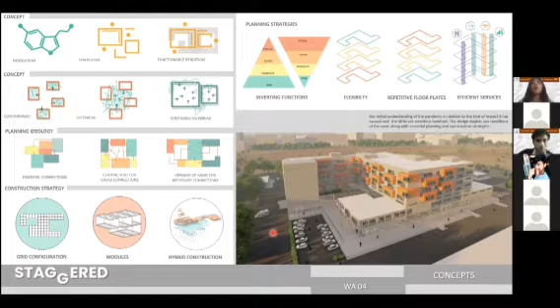Site areas in the need of healthcare centers. That's how we came to the Pimpri Chinchwad area in Pune district. We also did a lot of research in terms of where new quarantine facilities were being established so that centers can provide healthcare support to them. Here, there is also optimal use of a site which is lying absolutely obsolete during the time of the pandemic, which otherwise plays host to farmer trade fairs.

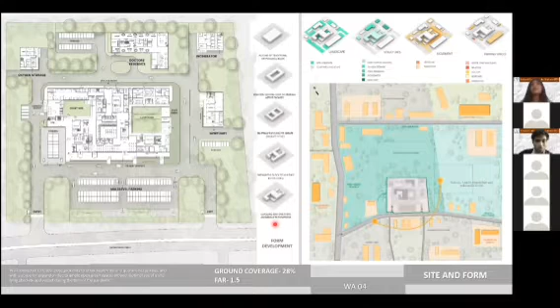While developing the form, central voids were created in the hospital blocks to provide for courtyards and to also... the central arm has several main functions and hence is wider, while the other arms house ancillary areas and are sized accordingly. The block is kept as one consolidated structure for extremely smooth transition of spaces as required in an infectious disease hospital. Vertical development was preferred in two main arms, while the front arms are kept low to optimize views for the whole structure and to also get maximum light into the courtyards. Next slide.

So talking about the planning, for us, it was always about the users of this program. Every space was first visualized by us as if we were patients. We constantly asked each other if we would like to step into this space, and if we did, how would we feel and function? So spatial planning was given utmost thought and is done with a lot of integrity.

The ground floor planning strategizes the spread of arms to provide various access points for different users. There are four main cores, one for relatives, one for doctors, for patients, and for the service to avoid infectious crossovers. The driveway leads you to the patient entry, which is placed in the center. And when the patients enter, they enter in a triage area for initial assessment. Optimal waiting areas have been designed, giving social distancing main impetus.

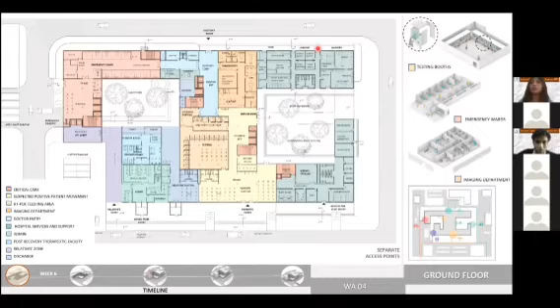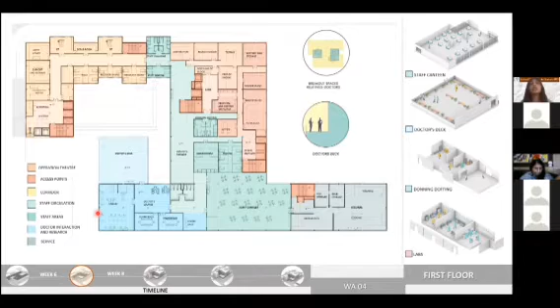Doctors, we feel, are the ultimate warriors over here. So providing relief spaces and decks for them was given necessary thought. The entire blue zone, as you see, is dedicated to doctors. We feel after spending countless hours on duty, it's imperative that there is a place you can go back to and rejuvenate. So the staff canteen is also connected to the kitchen, which has a service lift that connects to the upper floors. Yeah, done. Next floor.

Both ward units are placed such that they overlook into the courtyard and have maximum external connect to optimize the use of light and views for the isolated patients, which is desirable. All circulation spaces have been doubled to space out and reduce infectious crossovers. This also gives the indoors a sense of openness.

Sanitization stations are also placed outside every unit, while nurse stations are provided at strategic focal points for apt surveillance. Also, the doctor's lift opens out into a sealed doctor's lobby where donning and doffing units are provided before they step out into the sterile zones of the wards.

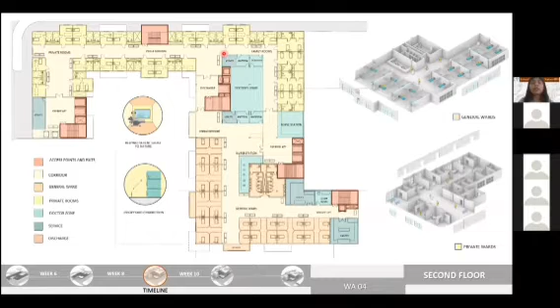We read about a lot of instances wherein patients were seen to flee quarantine facilities due to boredom or longing of family. So we thought it is essential that our design provides for such features in an atmosphere of extreme stress, uncertainty, and even depression. There are also waiting areas and disinfection booths for the relatives before they enter this area.

We also saw a lot of videos of patients dancing in their wards, which surfaced in Karnataka and Delhi during the peak lockdown period. So we thought of giving a multi-purpose and a breakout area for quarantine patients. And we want to also say that, as we emphasized earlier on playing with the words containment and outbreak throughout our design, we would like to put it this way, that these breakout spaces that we designed have helped in return to contain the patient's complete outbreak, mentally and physically.

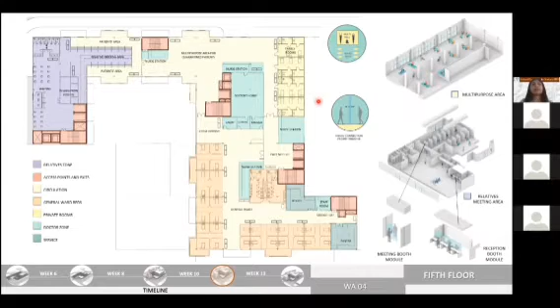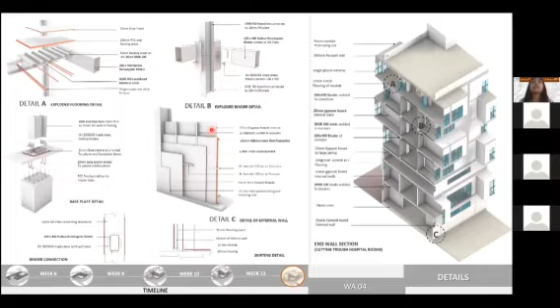PCC flooring is done over metal decking, supported over ISMB 200 joists. ISHB 450 are used as stanchions. Use of box section for binders helps in avoiding cutting at beam-to-beam joinery, which again helps in saving time, ultimately. Cement board is screwed on the steel channel sections and is used for external cladding, while gypsum board is used for internal walls and the false ceiling.

That's about this slide. Next slide. So the modules make judicious use of steel, which is evident in the exploded views. The two attributes that we focused on were modularity and flexibility. So talking about the modules, the cement board flooring is supported by box section binders and ISMB joists. The gypsum board cladding is held by aluminium channel mullions, while box sections are used for transoms. Sheathing board and mineral wool filler is used for insulation.

Provision of double and single rooms on the same footprint of 8x8 column grid was essential and has helped us achieve a staggered form in our facade. The tubular sections used for the structural canopy, which is seamlessly on the front of the structure, is left untreated with transparent covering to highlight the use of steel at the entrance of the structure itself. Next.

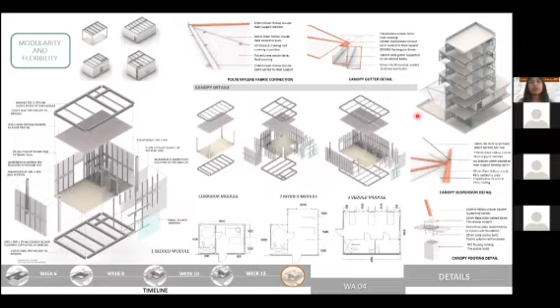Ultimately, we feel that our aim of the design was to keep everyone apart, yet together in a way. So yeah, that is about the presentation. Let's move to the video, Vipra.

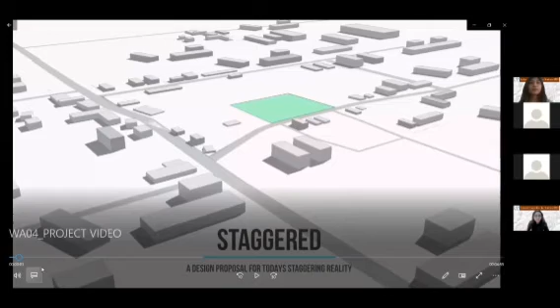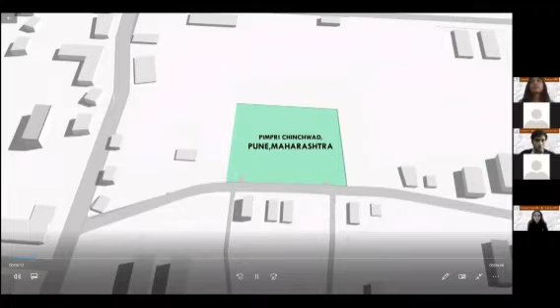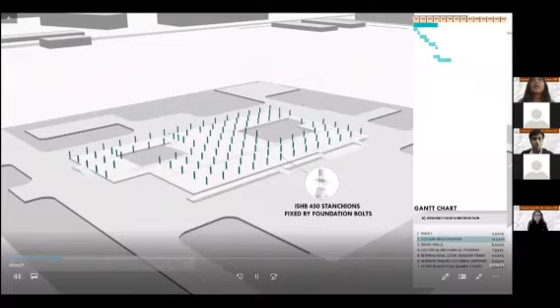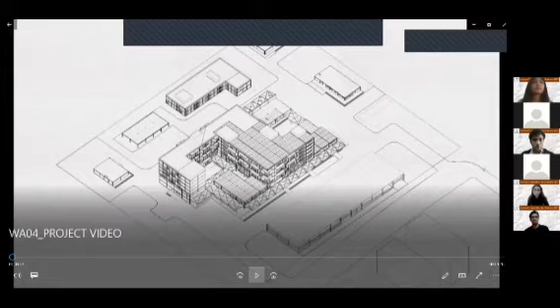Is the screen visible? Yes, it is visible. Vipra, I think the audio is not clear. Not heard, I think. Vipra, you can go back and show the recent one. Somebody can do the commentary. The commentary is recorded, sir. But actually that recording is not coming properly. Siddharth, can you present? Yes, sir. One second, let me present. Let me know if it's heard now. Yes, it is.

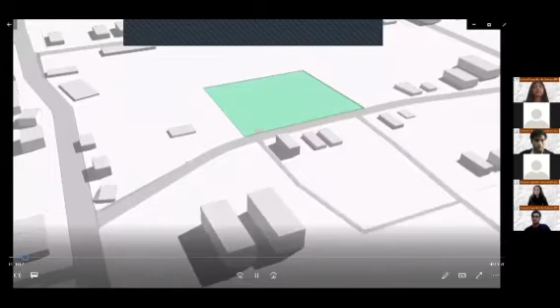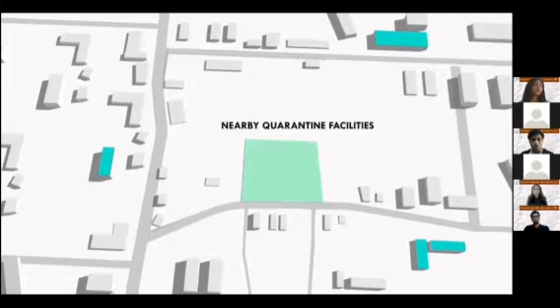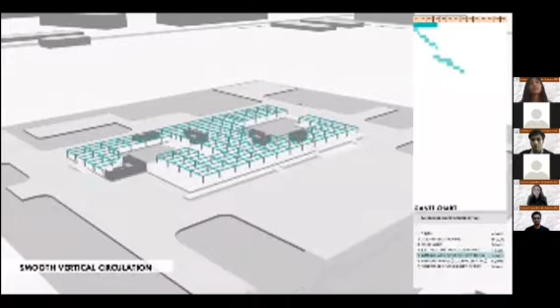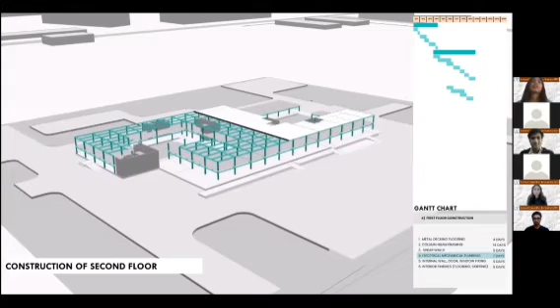Why this site? Connectivity to the Pune-Nashik highway, scope of expansion, nearby quarantine facilities to cater to, currently an exhibition ground, hence well maintained. Ground floor construction begins. Separate cores for different users. First floor construction begins. Hybrid construction, a combination of in situ for the ground and first floors and prefabricated modules for the upper floors, is adopted. The prefabricated modules are then assembled on site.

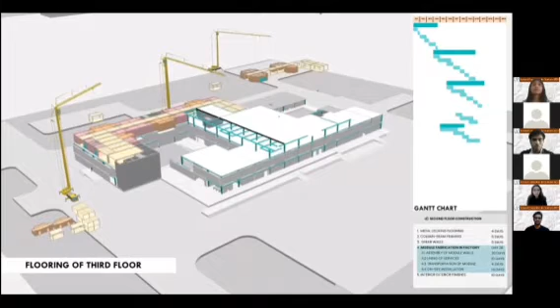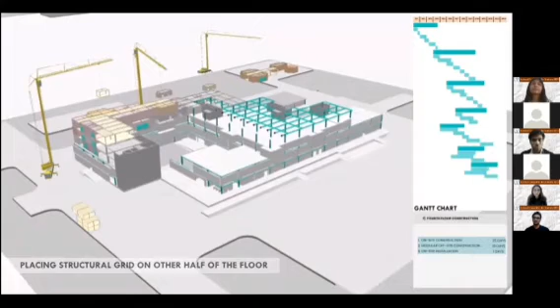Four types of modules: one bedded, two bedded, three bedded, and corridor modules make up the entire structure. Simultaneous process of grid and modular construction is used to speed up the entire construction process. Time being at the crux of the scheme was hence of prime importance, and all strategies have been implemented to aid a fast and seamless construction process.

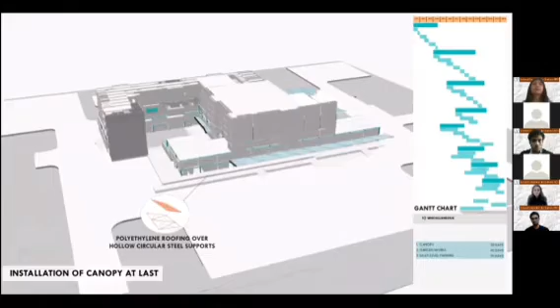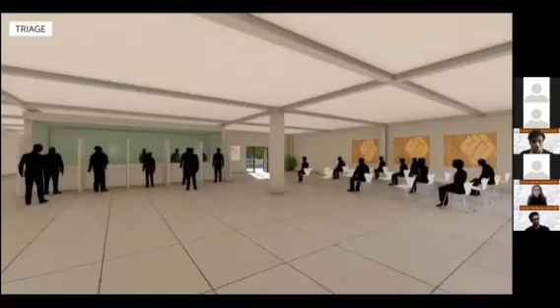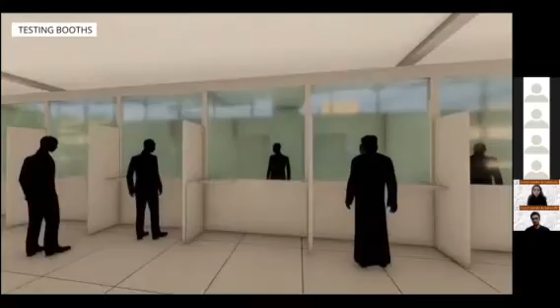The driveway drops you off at the wide plinth shaded under the magnificent canopy with separate entries for patients and relatives. The patient entrance opens up into the spacious triage where the segregation happens. Large waiting areas with proper segregated seatings, enough light, ventilation, and external connects are provided. The testing area encloses numerous booths essential for mass testing. External outdoor waiting area is provided for the relatives.

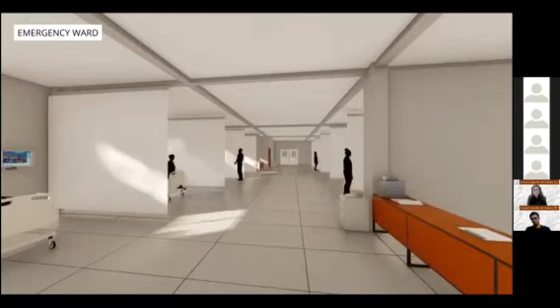The driveway of the ambulance leads you to the emergency zone, which has a separate direct access. The emergency zone consists of a separate waiting area, minor OTs, and the emergency ward. The ward is well lit and spacious with properly segregated beds and nurse stations provided at focal points for easy surveillance. The circulation spaces have been doubled to accommodate stretcher beds in case of outbreak.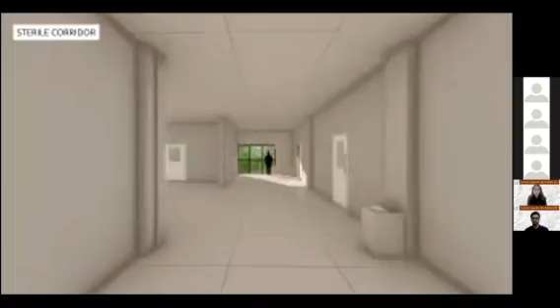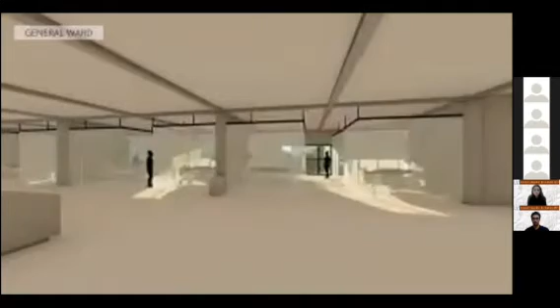The rooms are designed with an intention to give the patients a homely feeling. Each room looks into the central courtyard where the patients are visually connected with each other and with nature. The idea is to keep them engaged even in the times of isolation. The general wards have units of 4 beds placed in an 8x8 grid. Here too, optimizing light is given a priority.

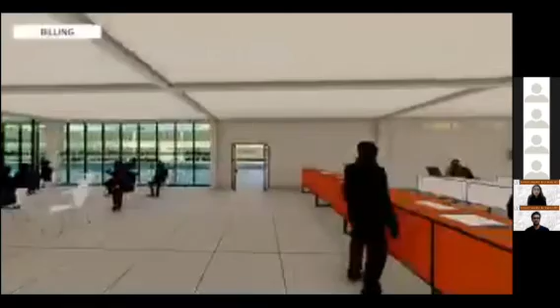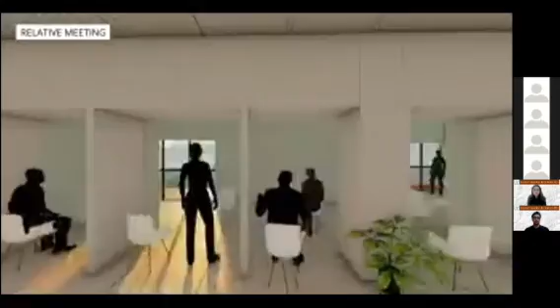The glass screening between the two waitings keeps them apart yet connected. The relatives' core takes them up to the thoughtfully designed space which brings together patients with their loved ones within the screen-separated booths.

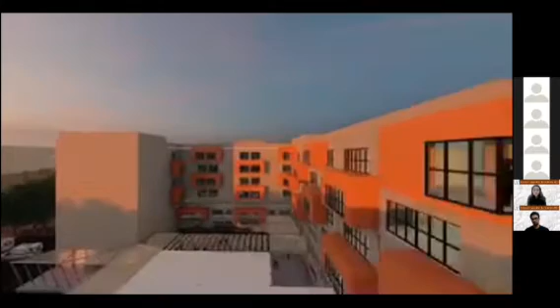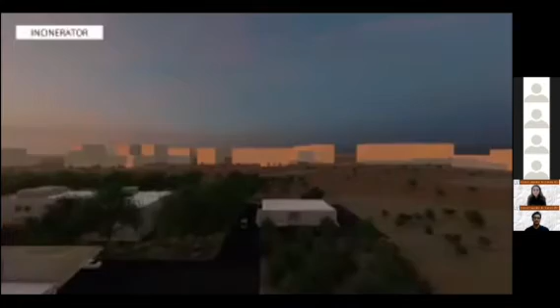The color, the stagger, the courtyards, the orientation, everything has been designed keeping the users in mind. The oxygen plant and the incinerator are placed at the fag end of the site. The canopy seamlessly runs along the whole structure.

The doctor's residence is placed at the back with a direct access to the doctor's entry. The deck acts as a breakout space for the doctors. Ultimately, the aim of the design is to keep everyone apart yet connected.

Yes, sir, we are done. We're done. So have you completed? Yes, sir. Okay. So now over to juries. Dr. Deshmukh first.

I'm quite impressed by the way you approach this design. Very straightforward, simple, modular, and at the same time lightweight. That's a very good thing. In fact, I liked your overall way of approach, and also you've taken into account the isolation of patients.

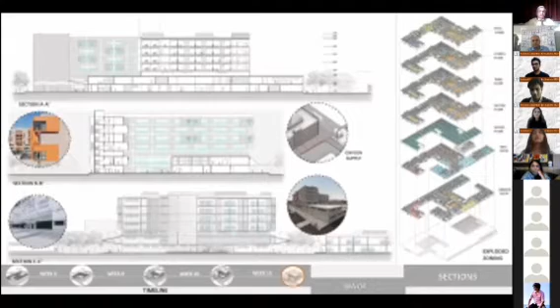Okay, so thank you very much. Thank you, sir. Yeah, good. Thank you, sir. Ma'am Dasgupta. Yes.

Siddharth and Avani and team, nice presentation. I like your concept of staggered yet together. And you have created spaces according to the functionality. So that's also fine, absolutely. But can you go into the plans once?

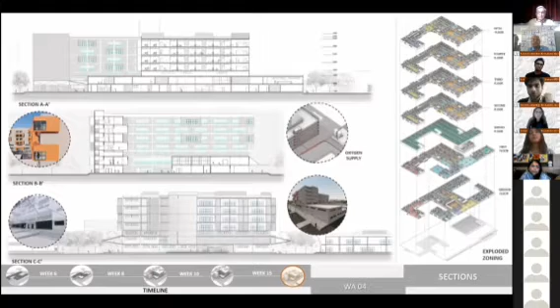Yes. Now, suppose the doctors unit and some other parts are not outside. It's not ventilated. You have to put AC in it. Is it? Yes, ma'am. On the ground floor, most of the spaces are ventilated. Just in the center, there is a lab storage area, just a storage behind the waiting in the orange zone of the diagnostics.

So that is some part not ventilated. But diagnostics require AC connection, so that's why it is planned accordingly. Okay, fine. What will be the height of your building? Height is around 25 meters. It is 25 meters.

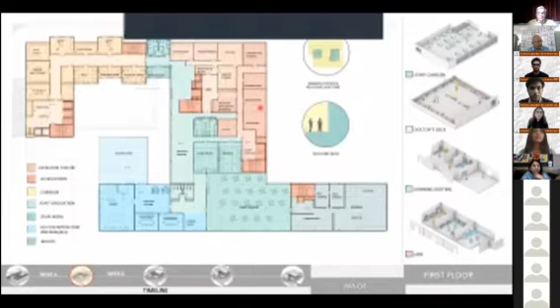And what are those yellow masses that come out from your building, which you said breaks monotony? How is it reflected in the plan? What are the use? Avni, can you go to the fourth floor and fifth floor? Next plan. Actually, ma'am, there are two kinds of rooms which we have provided. One is single bedded and double bedded.

So the double bedded room is protruding out by 2 meters. So we have provided an additional protrusion which breaks the monotony of the facade. At the same time, it gives a character to the facade. So in that way, we have staggered the rooms. At the same time, it gives a good character from outside.

And if you see, the basic grid of the module was designed to be 4x6. So the single bedded room is the basic grid. And to add a bed, we got this extra space that we needed to provide. And this space in turn provided us with the staggers that provided the dynamism to the structure.

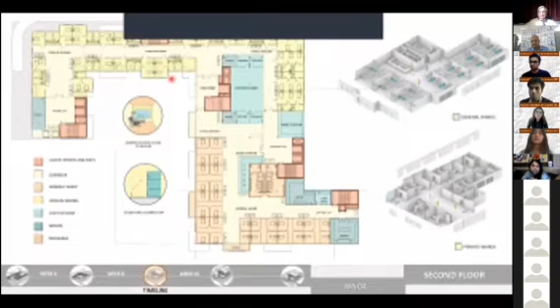And your structure is steel, and you have got infill panels, but you have used gypsum for the interior, right? Yes, ma'am. 20 mm gypsum boards for interior finish. But maybe not in all spaces you can use gypsum. Yes, ma'am. In case of diagnostic areas, X-ray spaces where concrete walls are required, at those places shear walls and concrete walls will be constructed.

Because cores are also of concrete, they are building up. They are shear walls. So in that way, some part can be RCC. So, ma'am, the design was a hybrid design. So the spaces that are planned where the grid of steel is formed, there the main diagnostics areas and all are created so that the walls can be constructed in concrete.

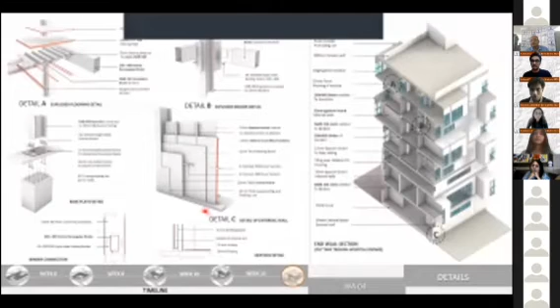Whereas for the modules, we have proposed this partition wall so that the modules are prefabricated and then brought to site and assembled. As basically lower levels require huge spaces, a larger floor space area, we have used an 8 by 8 grid. And similarly, as we go above those, there are modules.

So by the time the lower part is getting constructed, the modules can be prefabricated in the factory. Then they can be directly brought on site and assembled. So there is a simultaneous process happening. That's how the building is constructed, like the modules are constructed and the building is constructed at the site.

So it's nice. Even in the presentation, you've shown the interiors, you've detailed out the interiors, how it is looking. And I think it is a nice presentation.